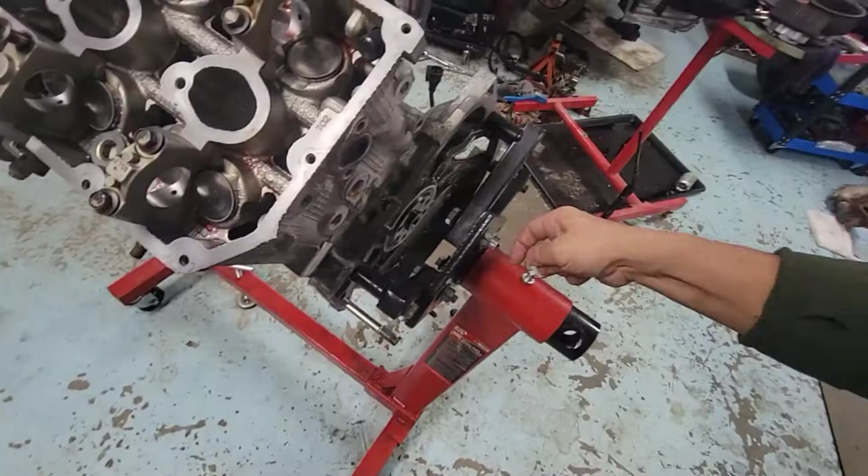So let's quickly show you guys on the passenger side right here. So just gonna quickly spin this engine out. All right, so here's the passenger side. We're just gonna quickly clean up the deck of this head. It's nice and clean already.

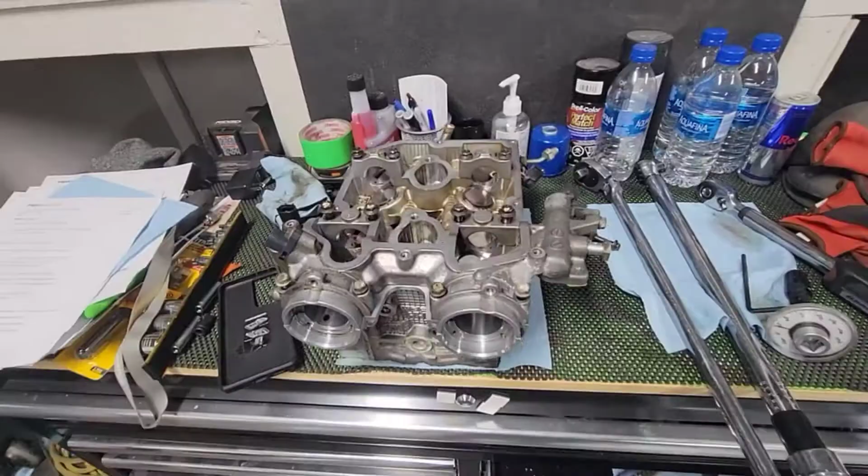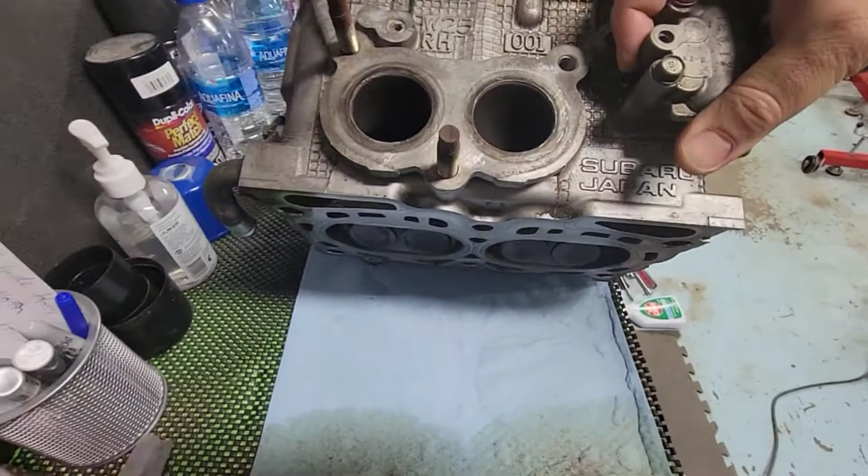All right, we're back on the bench. Here's the head right here. It's always nice and clean already. Lube up those buckets, clean the ports, clean the bottom of the deck. It's all nice and clean.

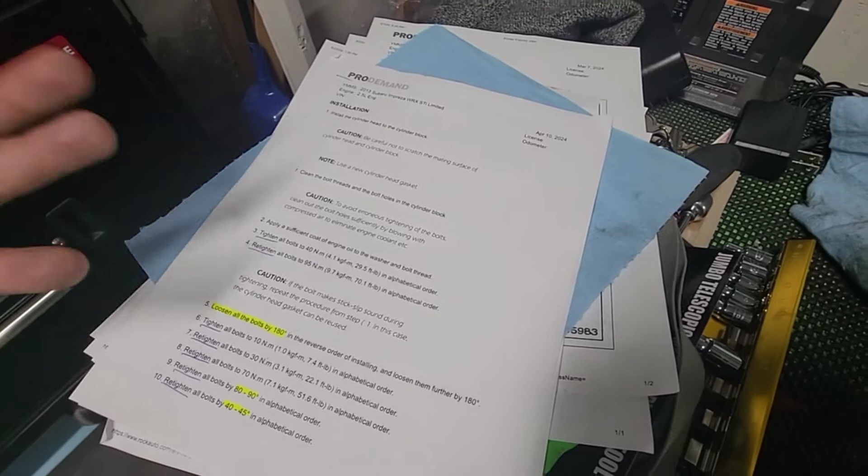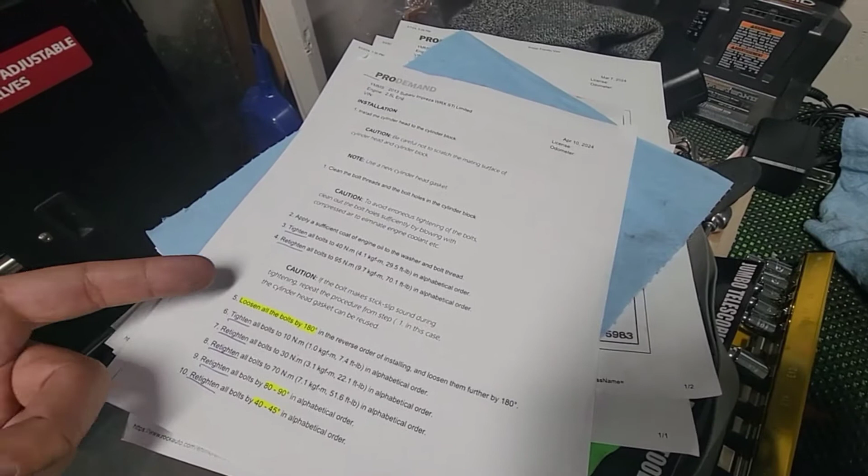All right, so here's the torque spec right here. We're just gonna quickly go over it. So make sure you oil up the brand new head bolts, all the way from the thread to the washer. First tighten to 29.5 foot-pounds, and then after that 70, and then you loosen it up 180 in reverse order, and then just snug it up to 7 foot-pounds again, and then 22 foot-pounds.

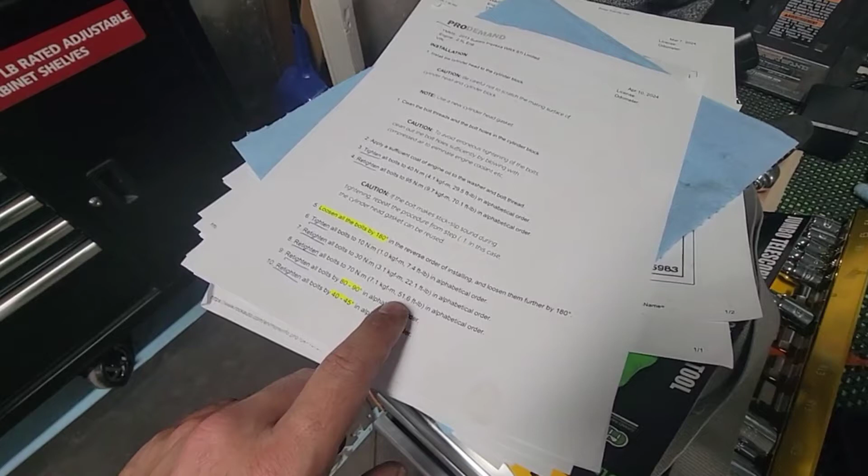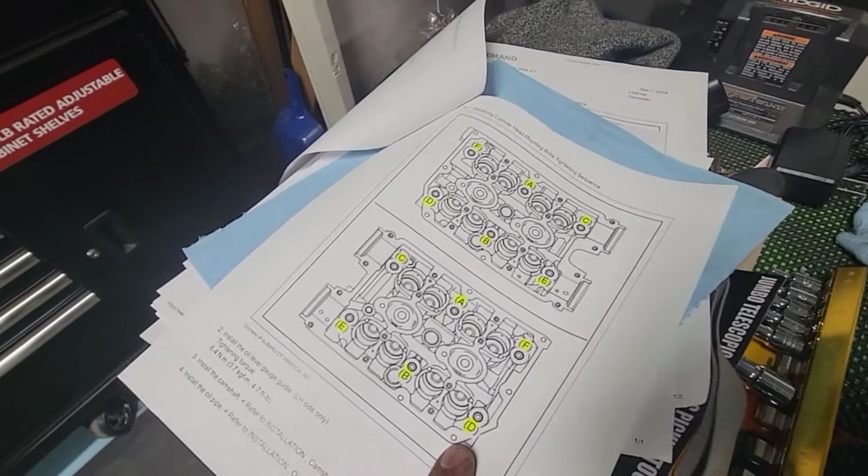After that 51.6, and then tighten the bolts 80 to 90 degrees, so you go 70 in between, and then after that 40 to 45 in order. Okay, so this is the order we're doing. This is the driver's side right here. You can tell, cut the corner, and this is the passenger side. That's the order A, B, C, D, E, F. That's the order that we're gonna torque it. Same thing with the angle torque.

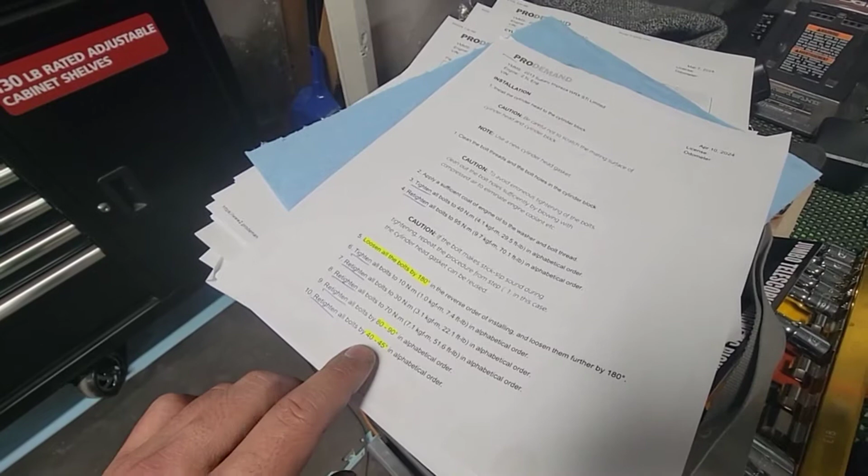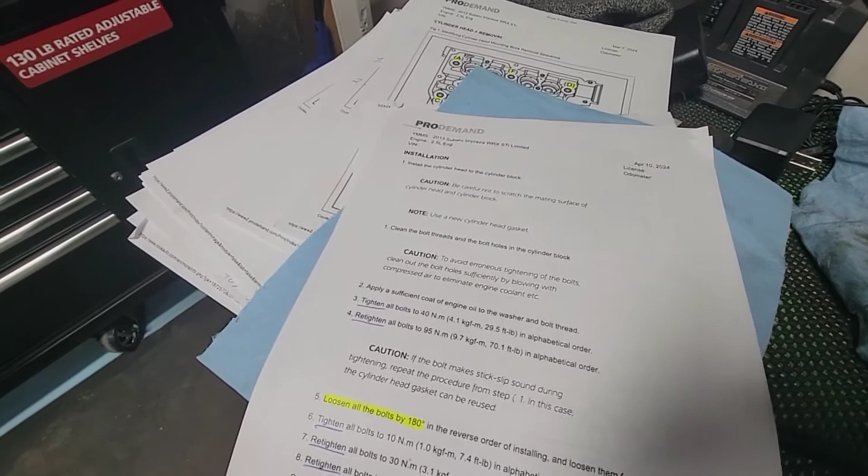All right, so after 40 to 45 degrees, you torque another 40 to 45 degrees, just A and B, so that would be just the middle. So we go 70 all together, all the bolts, and then 45 is the next all together, and then the last step another 45 for just A and B.

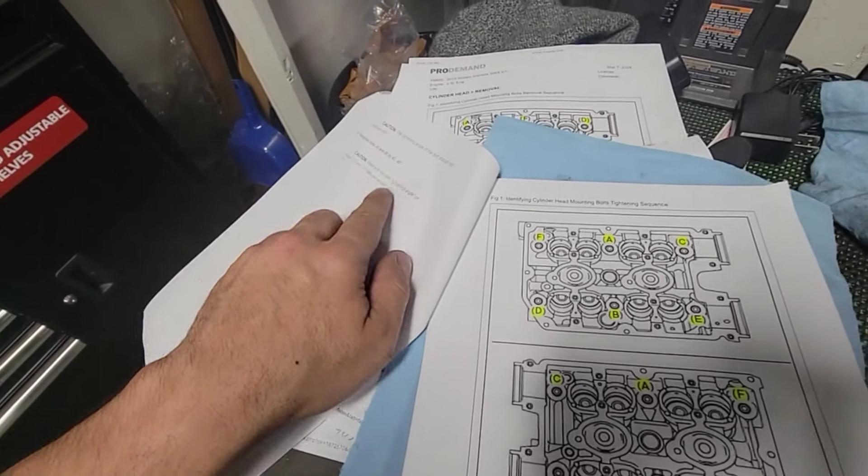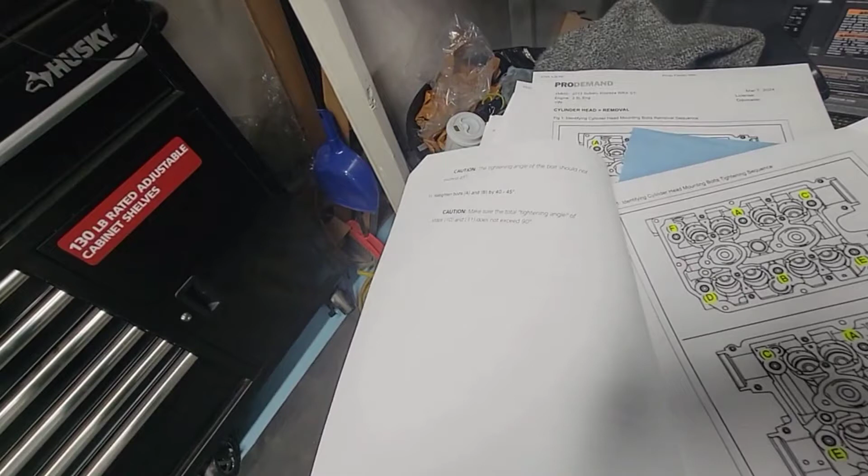That's about it. So make sure you don't go over 90 degrees. Step 10 up to step 11, that's 45 plus 45, that's 90. So make sure you don't go over. All right, so enough saying that. So let's go put this head on the block.

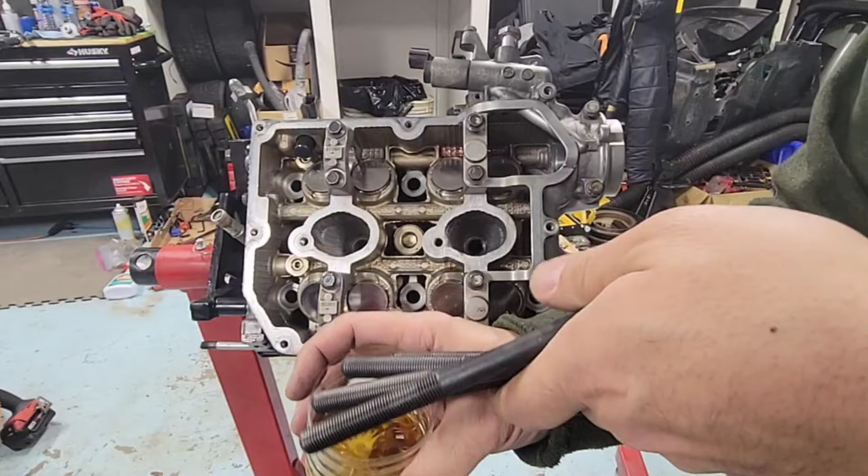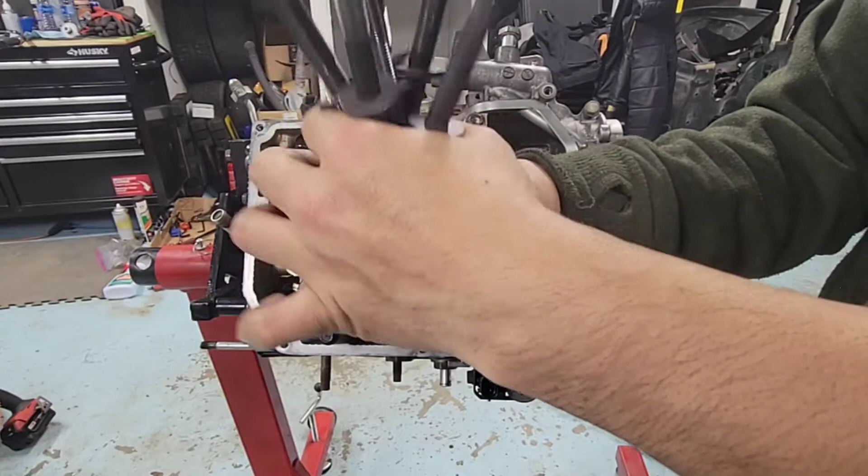All right, guys, brand new head bolts right here. If you care about the part numbers, right there, all the way from Subaru. Yeah, so just regular engine oil. Just dip it in here. Get it soaked up. And same thing on the thread and washer. Make sure that thing gets drowned in the oil. There you go. Oil her up.

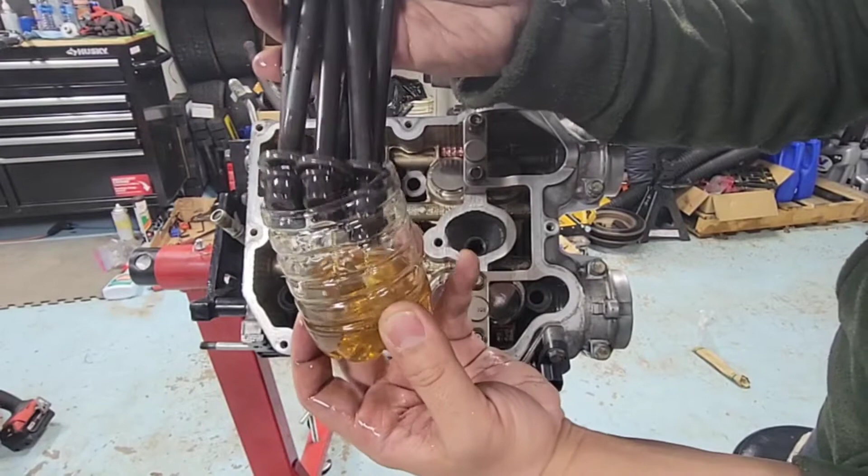All right, so first let's just bottom this bolt out all the way to the bottom. So what I use is a 12-point, 14 mil socket right here, 12 points. Bottom it out.

Alright guys, the last step, A and B, the two bolts in the middle, 45 degrees on those two. So torque this head bolt, 45 degrees. All right, there we go. 45 degrees on the last 2 bolts right in the middle. All right, guys, so that's it. Torqued to spec. Head gasket installed. Head bolts are all torqued.

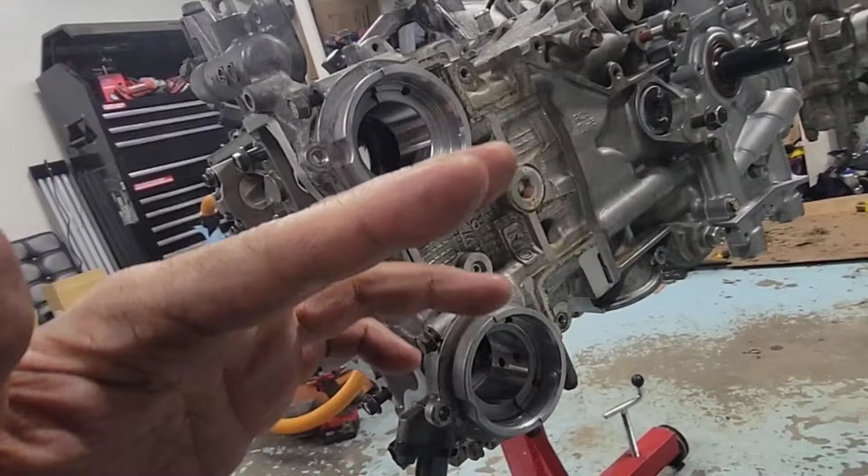Okay, so next step will be we're gonna put all the intake and exhaust cams right there, lube it up, torque this to spec, and then all the sprockets for both sides, and then we'll put oil, cover it up with oil. Then we'll put the valve cover on after, torque to spec, silicone the bottom here, the side right there, silicone. And then after that, put the half cover for the timing belt, and then we'll put the timing belt and then all the sprockets and tensioner, torque to spec.

I got a special tool I'm gonna show you guys. There's a special tool to hold the sprocket right here. Finally came in. So stay tuned for that video. But for now, quick video. There's a lot of videos on how to do this head bolt and head gasket install, but this is just a quick video for you guys.